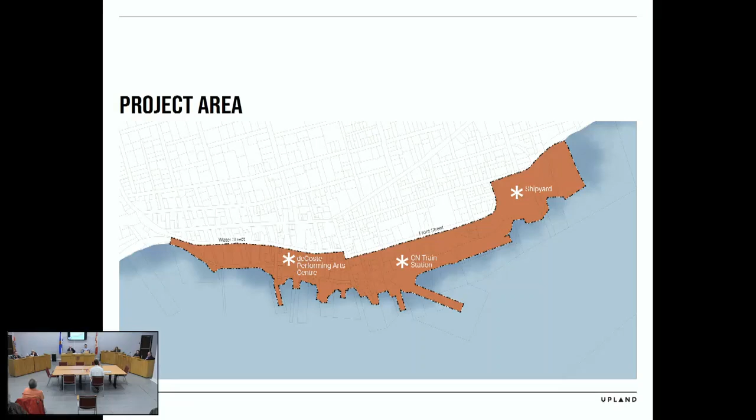The project area included the bulk of the waterfront. It was bound by Water Street and Front Street, going southward towards the harbor, with key landmarks on the eastward and westward sides being the shipyard and the DeCoste Performing Arts Center. It extended beyond in each direction, but that's the bulk of the study area, the traditional area people think of as the Pictou waterfront.

There were four key steps we took to complete this project. The first was background research and analysis, where we looked into macro, meso, and context-specific trends and issues at play in the waterfront, and what are the key pieces of the waterfront that make it unique.

Then we went into the community engagement phase, and in January we released the draft waterfront plan, which we presented online. And here we are tonight with the final waterfront plan, presenting to you, Council.

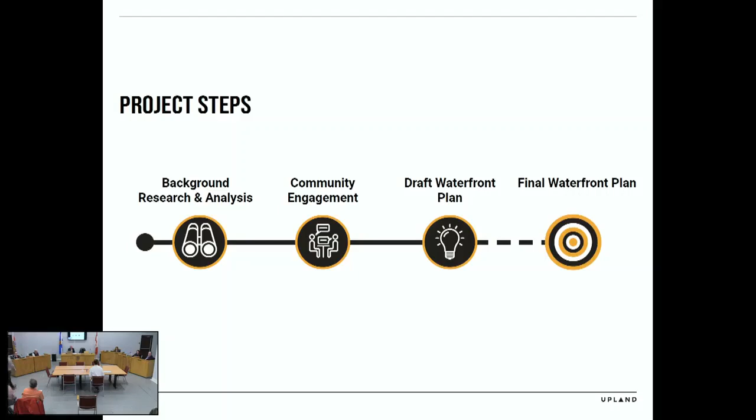So we did that initial phase of engagement. We were on the waterfront a few nights during the musical waterfront series, taking people's notes and hearing what they had to say about the waterfront, what they love, what they wanted changed. We had an online interactive map where we had nearly 200 people comment.

There was so much excitement in the community, and this was just an exciting project for us to work on because of that excitement. Then we held a series of stakeholder interviews and focus groups with stakeholders in the community.

We took that background research analysis and public engagement, and drafted a vision, which I'll read out for you tonight: Pictou's waterfront will be the center of civic life and a gathering place of creativity, culture, and innovation. It will be the first choice public space and destination for residents and visitors, with equitable access and inclusion for all.

The waterfront will help strengthen Pictou's connections with surrounding communities, and it will spark social, cultural, and sustainable economic opportunities that benefit the town and region. The waterfront will be reflective of the diverse history, heritage, and cultures that have occupied Pictou and its surrounding areas, all the while ensuring the town and community continue to evolve together.

We also developed a series of 8 guiding principles. We drafted the vision and these 8 guiding principles, and together they really guided how we were to develop the waterfront plan: celebrating the waterfront, having a lens of holistic history as we look forward in the town, and inclusivity in every sense of the word.

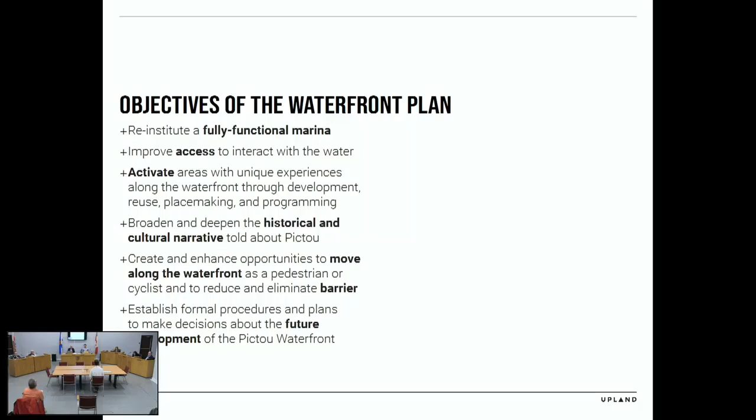So we created a draft waterfront plan, and we released that, as I mentioned, in January of 2022, and we went through a round of public engagement. You can go to the next slide there.

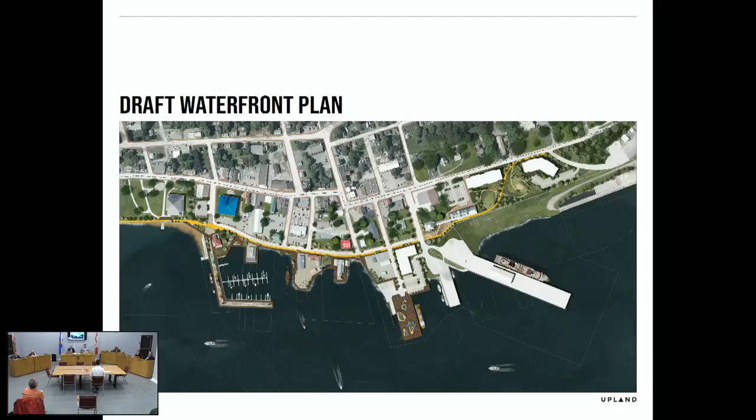Again, there was a lot of feedback that we got on that plan, and it was great for us to reflect on as we were developing the final plan. So we presented at the end of January, and there were around 60 people that attended that presentation, and a series of questions and comments that we got.

Again, we released the interactive map with the updated plan, and we got 150 plus people commenting on the map. So much excitement in the community, and then written feedback through emails and a summary document workbook that we created that people could either send in electronically or drop off at the town, and we got some hard copy submissions as well, which is great.

Reflecting on some of the key themes that we heard from the draft plan, there was really strong support for many of the key proposed changes that we had on the Pictou waterfront, including improving access to the water, the potential development opportunities that they saw, as well as improving active transportation and removing barriers on the waterfront.

There was some concern expressed both at the public meeting as well as online about the loss of the ball diamond here at the CN station, as well as the lobster carnival, and I will address those in the presentation later. And then as well as interest in how the plan will be financed and how infrastructure, current and future, will be maintained for not just now, but for 10 to 20 years down the road for the town.

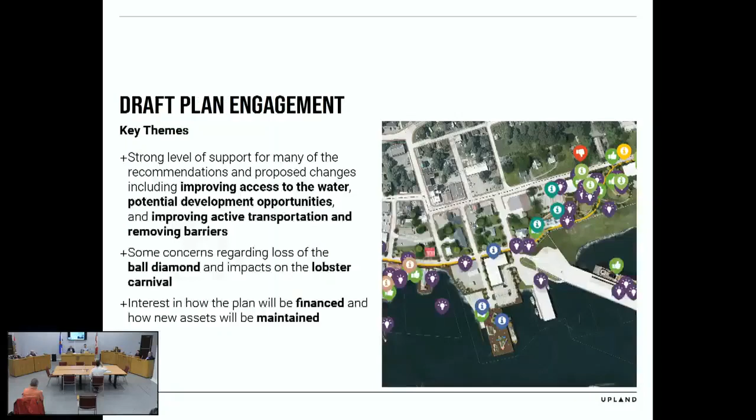Within the plan, we've broken down the recommendations into 5 key sections. The first one being the area improvements. These are the physical changes along the waterfront that you'll see, but they're also supported by a series of 4 other policy and programming sets of recommendations that really support those physical changes: identity and promotion, access and corridors, programming, and then planning and policy.

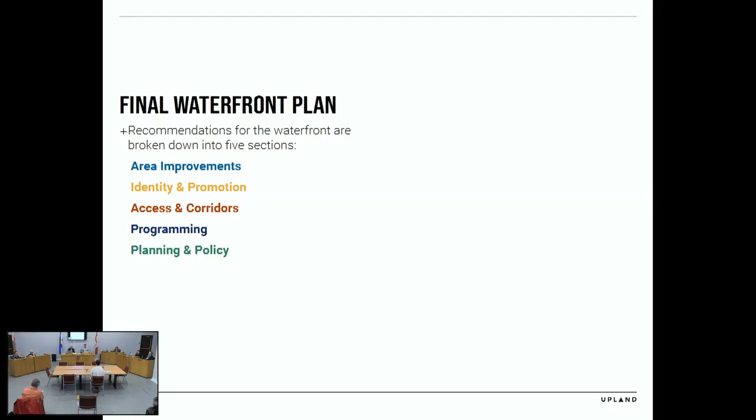So yeah, the first one being those physical changes along the waterfront, and I'll go through those individually, and you can go to the next slide.

This is the proposed change for the deCoste Performing Arts Center and the future library. This will be a key site on the waterfront. People will be spilling out from the library or from performances at the deCoste Performing Arts Center, so it's key that this space is really integrated with the rest of the waterfront.

You can see there's the beginning of a boardwalk there, as well as two at-grade beach spaces. We had initially proposed a beach space in that corner, but there was concern regarding it being a tidal harbor, that how that could create a maintenance challenge for the town. So we essentially created them at grade, and then replaced the beach with seating steps, as you'll see in that image on the bottom left there.

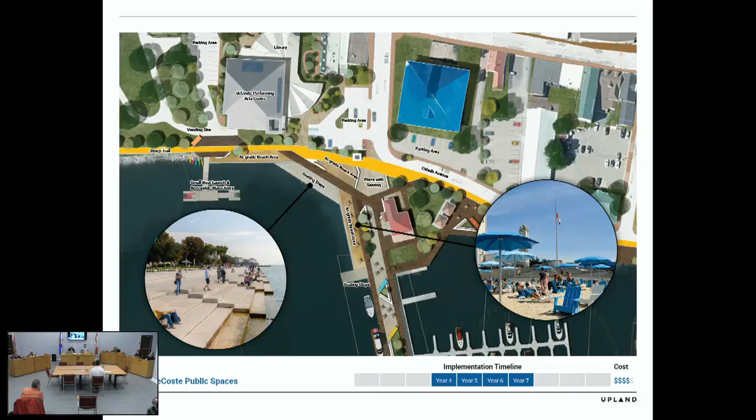We're also proposing to move the boat launch to the other side of the waterfront, so there's really a sense of play and creativity in this area. This is a midterm recommendation earmarked for years 4 to 7.

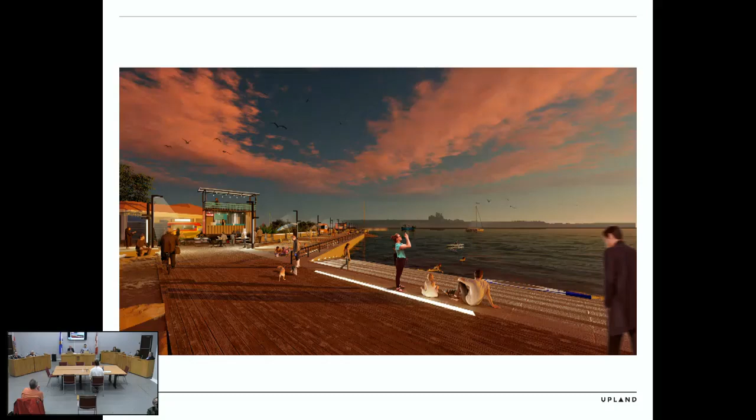This is a rendering looking towards the Market Wharf. You can see the mill in the background, and that would be the marina building on the left-hand side of the image, looking towards Pictou Harbor.

The next area we're looking at is the Market Wharf and Marina. Reinstituting the marina is a key piece of this plan, including reestablishing the breakwater that was removed last winter. We see Pictou as a key space in the provincial marine itinerary, so by reinstituting the breakwater and marina, there's space for boating within Pictou Harbor, Pictou County, and the Northumberland shore, as a key destination in the provincial network.

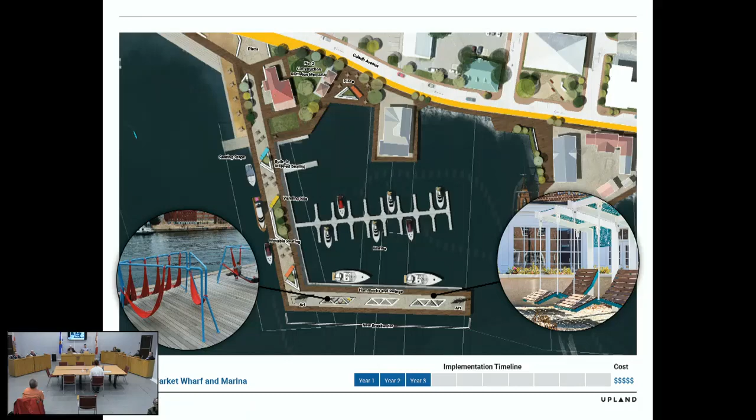We've also included public space improvements down the center and along the edge of the new breakwater, with space for vending sites, flexible seating, built-in seating, swings, and hammocks to keep that flexibility. There's a key element of flexibility and creativity within Pictou, and we want to reflect that in some of the key elements of the plan.

The next space we're calling the Quay District, looking at the Hector Heritage Quay, the Fisheries Museum, and the RCMP station. The key recommendations for this site look at improving public access around the Hector Heritage Quay and making connections with the Fisheries Museum.

We understand these are private lands, so this would require some sort of cost-sharing agreement or other agreement with these landowners to make these improvements. But we feel this is a key piece, central in the waterfront itself, and being able to navigate around the Hector site and make connections with the Fishery Museum is really important.

Looking at the RCMP station, if this space were to ever become vacant, there's an opportunity to create a civic space on the southern end where the parking currently exists. There are about 12 parking spaces there, but through landscaping and seating areas, you can create a unique civic space just south of that building. With the town owning the property behind the RCMP station, there's a negligible loss of parking on that site.

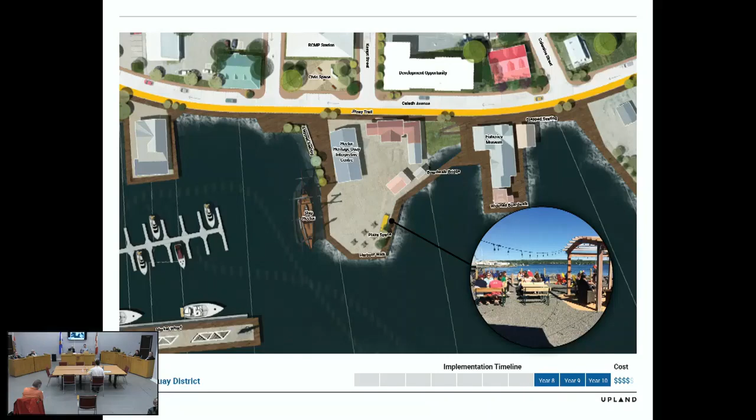The next space we're calling the Creighton Street development. This is the former bottle depot site that the town recently acquired. It's a great development site for mixed use, either light industrial or commercial, or a combination of them.

Right on that site, we're integrating the boat launch and a turnaround area on the eastern extent of the property, moving it from the current location to this one, more in line with the industrial nature of Pier B and Pier C right next door, and leaving the other side of the waterfront more for that play and creativity side.

Looking at the property to the north, currently the cruise ship welcome area, with the plaza space I'll speak to next, there's another opportunity long-term down the line that this could also be a future development site for the town.

Finally, at the southern end there's a floating dock area and another seating step area, again trying to integrate as many areas to interact with the water itself.

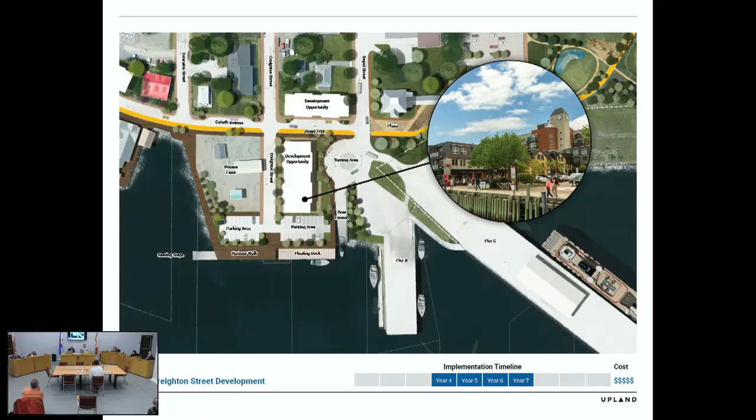On this site, we're looking at the CN rail station, the building we're currently in. We visited it multiple times on our tours of the town, and there's so much potential here for either commercial or community use, really making this an eastern hub and node at this end of the waterfront. Something is missing at this end, and by transitioning or reimagining this building for community or commercial use, that core piece currently missing could be filled.

Also, building that seating plaza that you'll see in those images, we can pay homage to the rail station just through simple lines in the pavement. This creates a plaza space that can be used for either food trucks or some sort of market stalls.

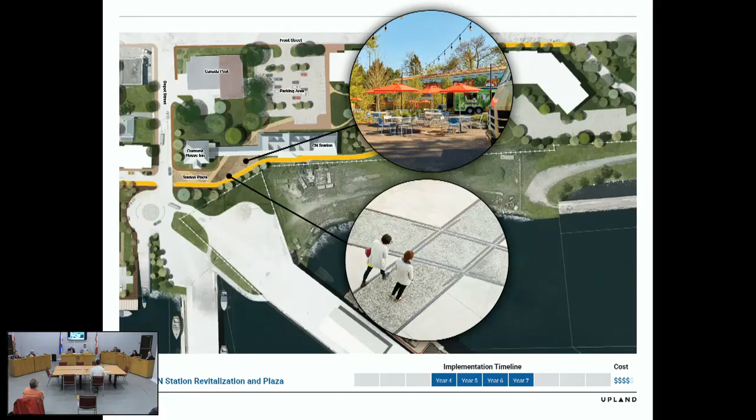On the next slide, we've imagined this space as a Christmas market. On the far left is the Custom House Inn, and in the background is the CN Station building. In between, we're using that overhang as almost a Christmas market, with an opportunity for stalls and lighting to reimagine this end of the waterfront.

Looking towards the ball diamond, what we're calling the Pictou Common. There was concern regarding the loss of the ball diamond, and in discussions with the town, it was important that the ball diamond be replaced elsewhere before the Ricky Sutherland Memorial ball diamond is removed, ensuring that space is replaced elsewhere in the town before any of these works are done.

There's an opportunity for a raised lookout or berm where you'll be able to overlook the harbor, as well as two play spaces—one a traditional playground, and another we labeled a splash pad, providing a secondary play space—as well as a small performing arts space that can be used for movies or outdoor plays.

To help finance this project, there's an opportunity for residential development on the north side of Front Street, looking at either subdivision or leasing from the town, since the town does own these lands, as an opportunity to finance these projects.

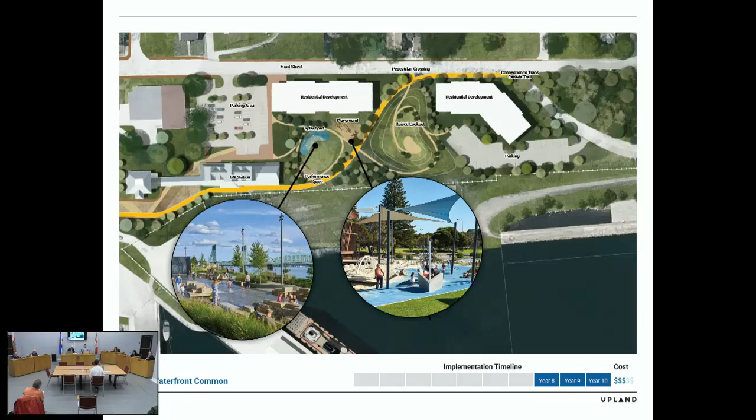So the Lobster Carnival is very much part of the future of the Pictou Waterfront, despite it may not look exactly the same as it has in the past. We just wanted to state that. Go to the next slide.

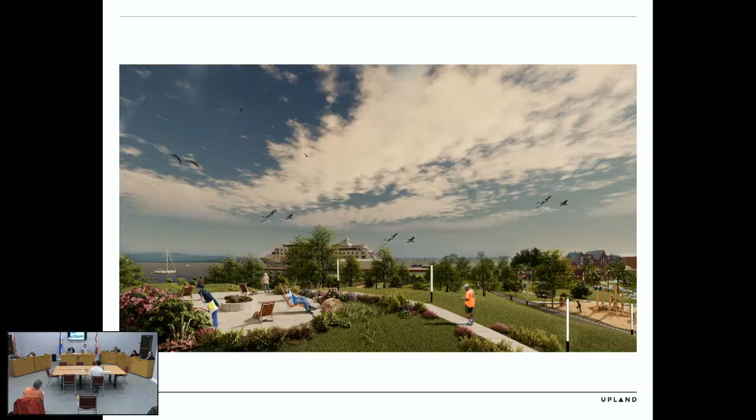This is a potential rendering of looking atop the berm towards the harbor—up on top of that berm, looking southward towards the harbor where that cruise ship is.

That's the small performance space, lit up with lighting, as well as being used for outdoor movies there. Go to the next slide.

Finally, the waterfront will be connected with a series of boardwalks, what we're calling Harbor Walk. This creates a cohesive identity and theme throughout the waterfront, so once you've arrived and touched down on the boardwalk, you just follow it throughout the rest of the Pictou Waterfront.

This one is implemented not as its own project, but as part of other projects. So when the Market Wharf and Marina gets implemented, the Harbor Walk gets implemented as well. You'll notice there's no cost associated with that one, because it's just integrated with the other projects.

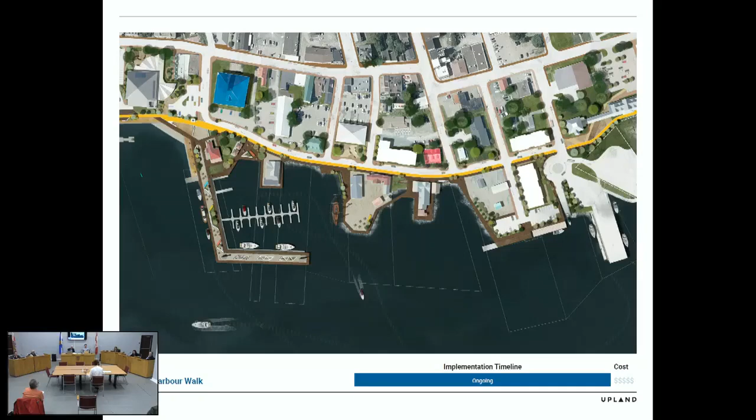The next set of recommendations looks at identity and promotion. These are more the softer side of the Pictou Waterfront, not spatial or physical changes. The first is developing a Pictou Waterfront identity—it's important that when people arrive at the Pictou Waterfront, they know they've arrived, creating that identity.

Developing a palette of site furniture—again, these are all spatial cues that remind someone and give them the sense that they've arrived at the waterfront.

Next one being adopting a holistic, integrative, or interpretive approach. Site interpretation is important—this is how someone goes around the waterfront and learns about it. It could be as a traditional panel, or it can be multimedia or sensory.

Importantly, there are several themes we could potentially explore, such as natural environment or built environment. There are also opportunities to integrate Mi'kmaq heritage and Mi'kmaq culture, but it's important that this work be done with those communities to ensure the story is told with the consent and with the knowledge, and it's built by the Mi'kmaq communities.

The next one we're looking at is promoting the waterfront to locals, tourists, and marine visitors. These are three distinct but very different potential users of the waterfront, and they'll each have different strategies we can use to reach these groups—whether through a website, a social media campaign, or marine itineraries and information for travelers: how boaters get around, and when a boater gets here, what the 3-day itinerary looks like once they reach Pictou.

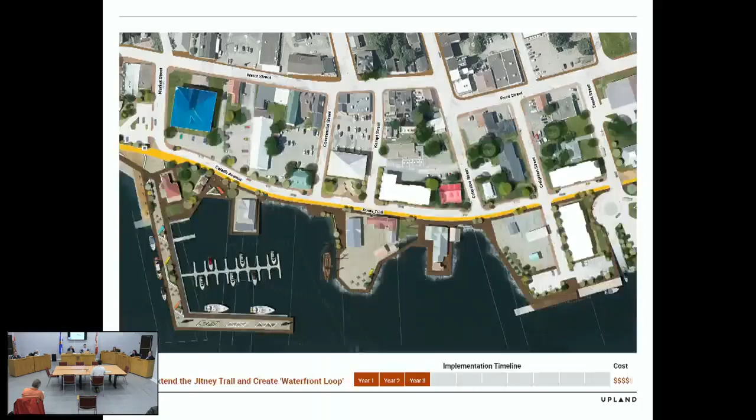As you'll see here, this is a rendering looking towards the Hector Heritage Quay interpretive site. You have that bi-directional trail and the harbor on the right-hand side, and the one-way traffic on the left. By turning Caladh Avenue into a one-way street, we're essentially creating a waterfront loop for automobile traffic.

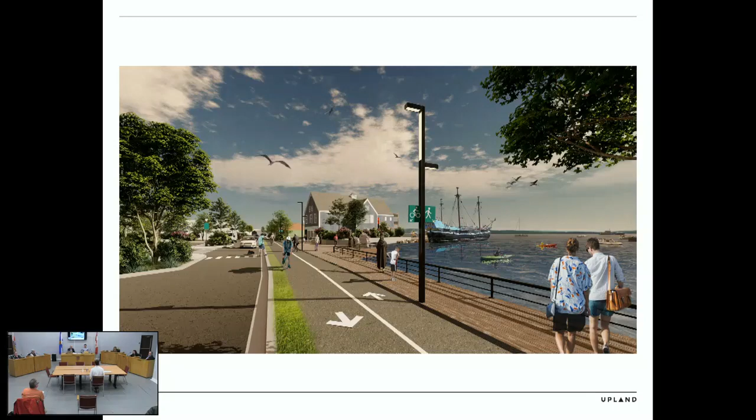People coming down Water Street can turn down some of the side streets to get to Caladh, but it's promoting people to go up Water Street down to Front Street, which is great for local businesses—getting more eyes on the street for them.

The next one is developing a waterfront wayfinding system. How people get to and around the waterfront is integrally important—again promoting that theme of identity. How do you know you're on the waterfront when you're there?

Linking the downtown and the waterfront—this is looking at placemaking. Even using paint on the street or murals on street corners to draw people around corners and either down Commercial, Kemp, or Depot Street and other side streets that people may not think to frequent, as well as signage and public art. Those things are great explicit and implicit cues for people to travel up and down the waterfront.

Developing an integrative approach to parking. There's currently on-street and off-street parking, but as I said, that waterfront loop will help promote people to come to areas they wouldn't traditionally park.

The CN train station is an underutilized asset for parking on the waterfront. By creating that waterfront loop, we're helping push people this way, and with other assets such as the Harbor Walk and the Jitney Trail, you can park at the CN train station and then go explore the waterfront instead of circling to find a parking spot right where you want to go.

Other recommendations within this include EV parking or electric vehicle charging stations. EV charging or EV automobiles is a growing mode for people across Canada, and it's important that there are stations in town that people can use to charge their vehicle and then explore the waterfront.